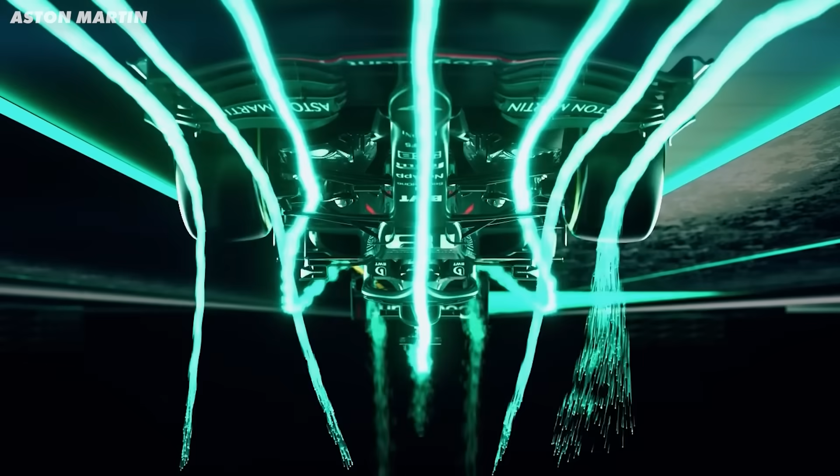£14 million. That's how much Project Inversion is going to cost. It is a huge amount of money, and in this video I'm going to share why it costs that much. If you're new to this series, we're planning to drive a Formula car upside down for 5 seconds with aerodynamic force alone. So the main costs, as you can imagine, are the car, building the tunnel and hiring the location.

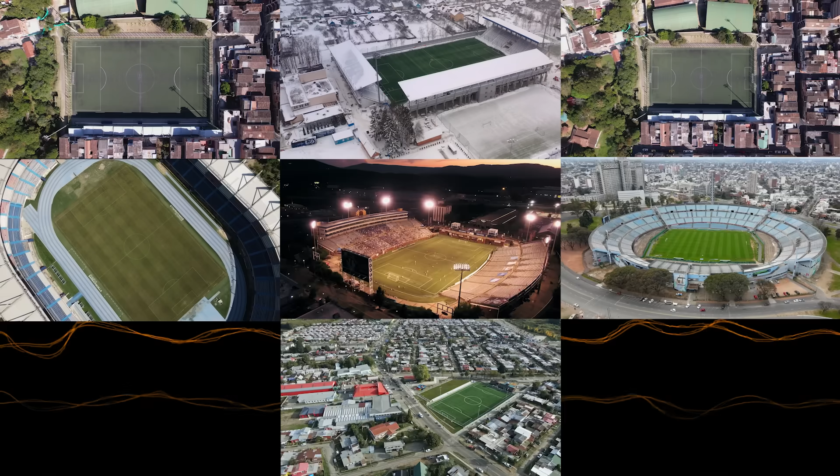And just the size of this project is astonishing. 1,330 tons of temporary steelworks, 131 tons of temporary aluminium works, 49,000 meters squared of plywood. That's the same as 7 football fields. And all of that plywood has to be held together with something, almost 500,000 screws. It's a whole load of materials, but we're using as many standardized off-the-shelf parts as possible, with our structural engineers having planned for as much reuse as we can.

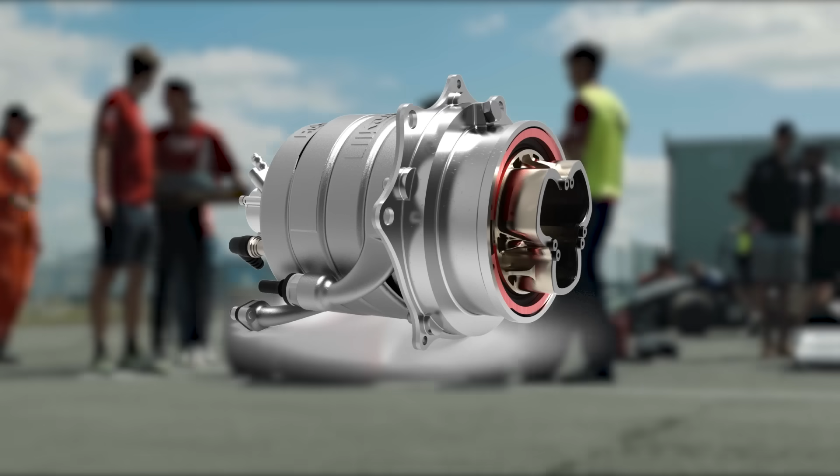So let's start breaking down the costs, and let's begin with the car. We're using the Empire Wraith hill climb car as the base for Project Inversion. It's light, has high downforce at relatively low speeds to accept the electric motors and batteries I described in the last video. And as an added bonus, it was designed by our head aerodynamicist Willem Toet, so he knows the car's design better than anyone. As race cars go, the Wraith is actually pretty well priced, costing £65,000 brand new from Empire.

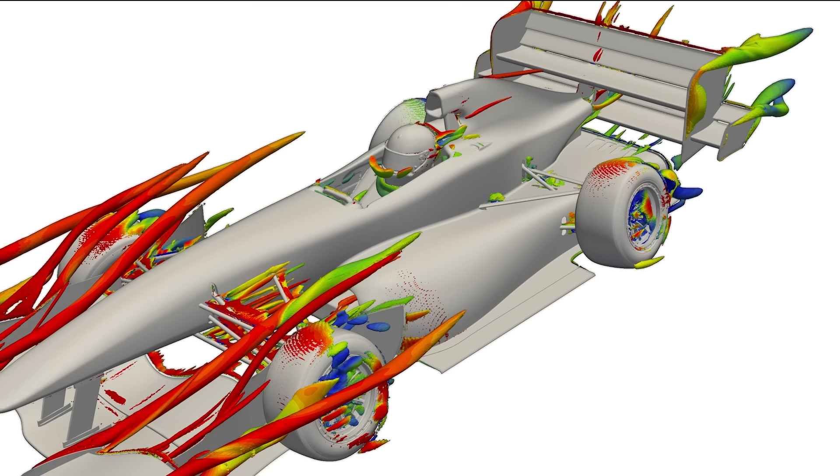As you might have seen in the second video of this series, Willem has made significant developments to the car, mostly aerodynamic, but we'll also need to make changes to the suspension setup and geometry because of the unusual curvature the car will be turning across and the camber required. So an estimate of the aero mods comes in at around £35,000.

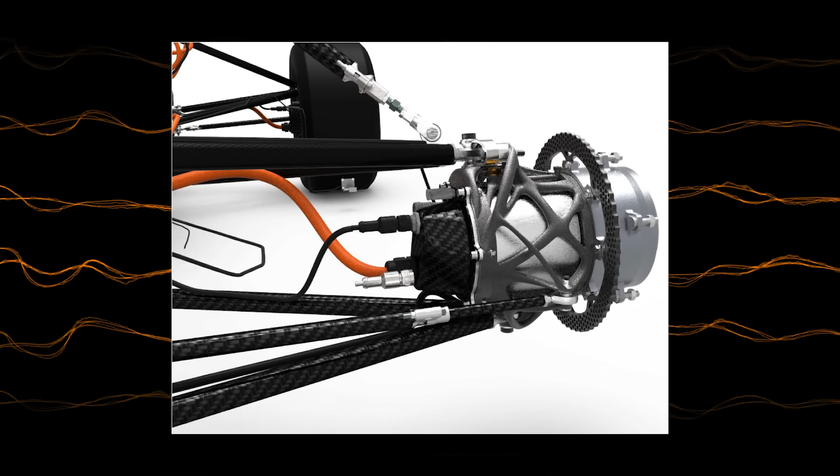But the main cost of the car modifications will be the electric motors and batteries. As discussed in the last video, we're likely going to be using incredibly small yet powerful motors, which fit inside each of the 4 wheels. As you can imagine, this type of technology doesn't come cheap. And we're actually yet to have a precise cost that we can share, but it will certainly be in the hundreds of thousands of pounds to develop.

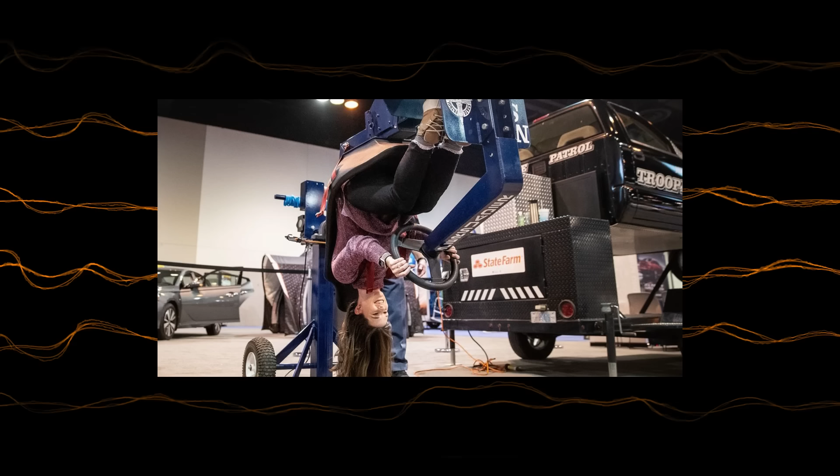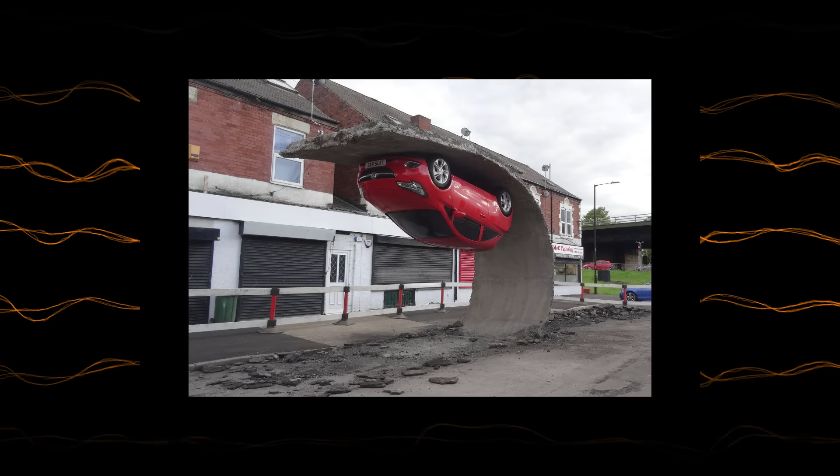So that's the car done, but we still need to test that it and the driver work upside down. And we also need to check that the downforce numbers that have come out of the computer correlate with the actual downforce the car generates. So we'll need to test that as well. First up, we'll build a mechanical simulator that can flip the car upside down while static. Here we'll be looking to make sure all of the systems on the car work properly upside down. We'll make sure that nothing unusual happens to the suspension, the motors and the battery, all things that have not been designed to run upside down.

Even small things like the seat belts could be an issue. Normal adjustable race belts have excess belt when you tighten them, which usually just sits neatly on the driver's chest. But when we're upside down, any excess belt would fall in front of my face, blocking my view. And that's not something we want to discover for the first time when we're doing the stunt.

And this simulator will help me get accustomed to driving upside down in a race car, which while it won't be the first time, it will be the first time I actually meant to do it. I imagine it's going to feel very unusual hanging upside down, and that it will take a bit of getting used to. I want to be sure I'm completely comfortable hanging upside down, as I'll need 100% of my mental capacity to ensure I drive the car properly and keep an eye on all the telemetry that I'll be shown.

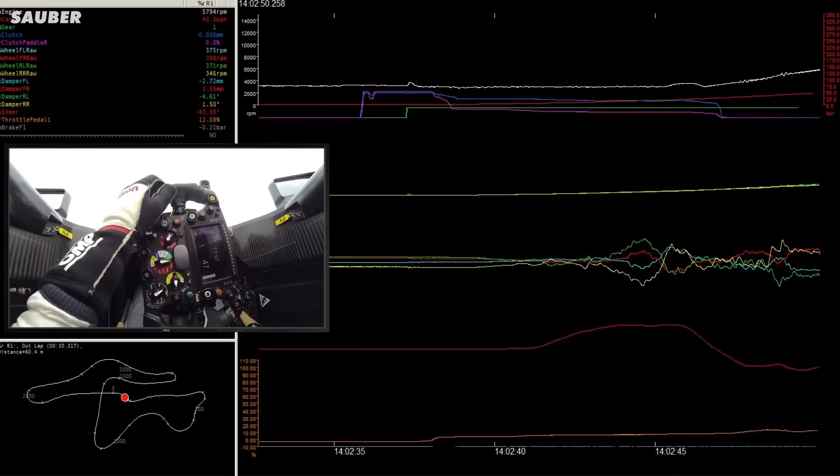So to make a simulator that can replicate loads similar to the event itself, and to purchase another chassis to use, as we'll be building the actual Project Inversion car at the same time, we estimate it will cost around £280,000. Once we've got the car and the driver comfortable working inverted, it's time to make sure all of the aero work is producing as much downforce as predicted.

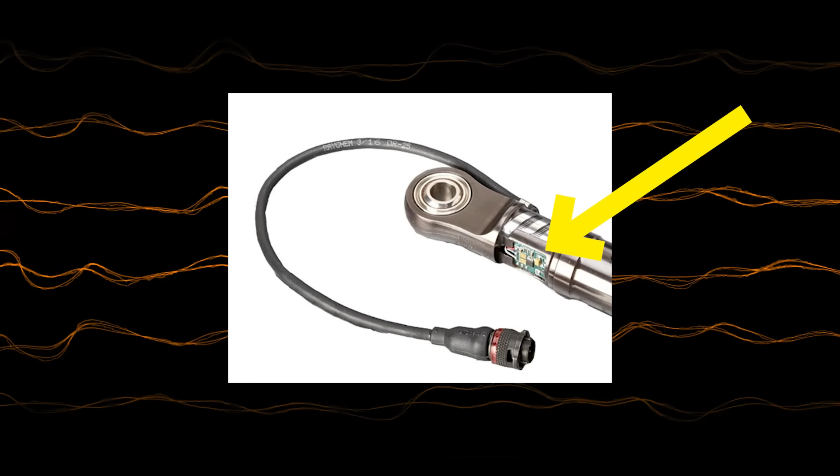The car will be covered in sensors to ensure everything is working how we expect. One of the most important sensors will be strain gauges in the push rods. As you might imagine, these measure the strain or the load going through the push rods, so essentially logging the car's mass plus downforce. The first testing will be done on a normal piece of asphalt, something like a runway. This is something that F1 used to do a lot to test aero.

Hire out a runway, do a straight line test that runs through a range of speeds, make an aero change and do the same again. And they do this to get real world data to show how different parts and settings affect the downforce levels. F1 doesn't do this anymore, but you might see drivers running at set speeds during a Friday practice session. When they're doing this, they're after the same data.

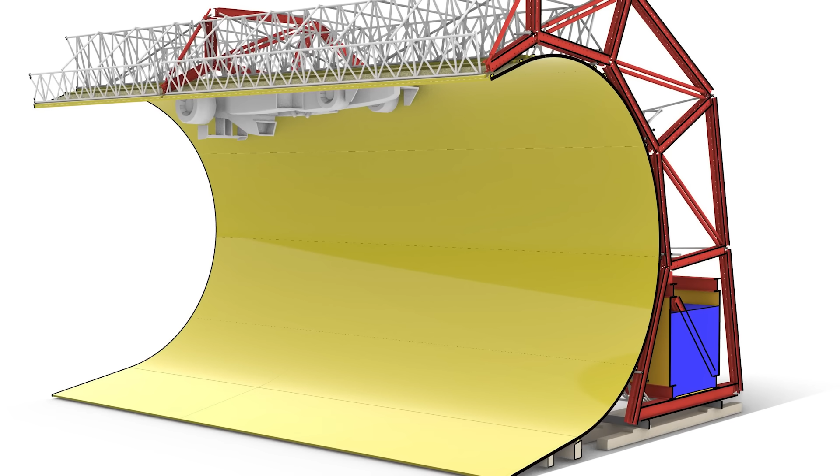Then, once the structure is built, we'll do some extra testing. This means we can check the car running in the curve of the tunnel. This is going to be critical, as the curve of the tunnel is going to negatively affect the amount of downforce we create. All in, we expect this testing to cost us another £170,000 if everything goes well. So that's about it for the car. Next, the real cost, the location and the structure.

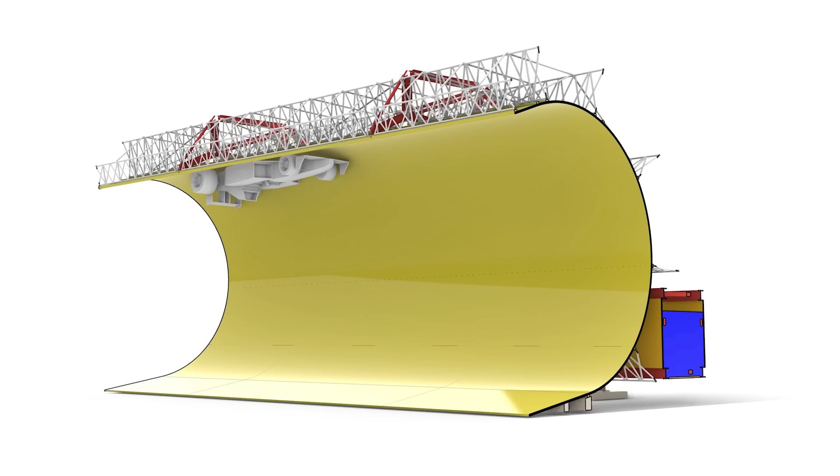The location for Project Inversion will likely be driven by the headline sponsor, so it's difficult to estimate what that will end up costing. It may be a large part of the budget, or it may end up costing very little. So for the purpose of this video, we've left it out. The location will also have some effect on the cost of the structure itself. Building this on a racetrack, a car park, or a runway will be cheaper than on less consistent ground.

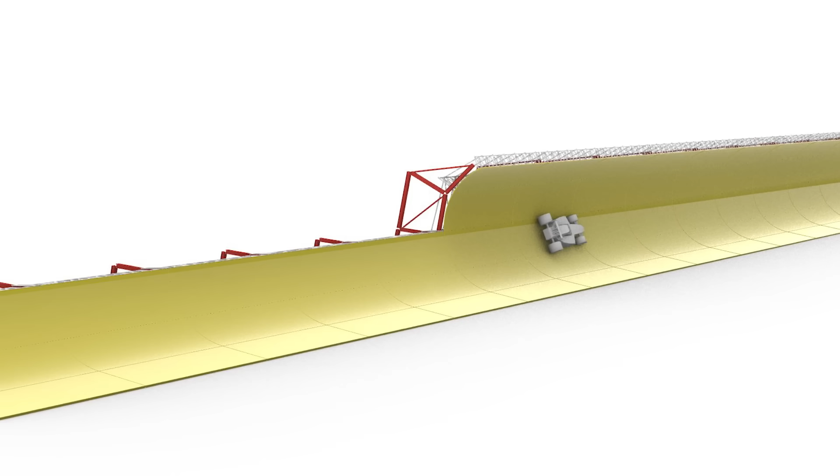And the location's temperature and the difference between the minimum and maximum temperatures and things like wind speeds will all make a difference to how the final structure will be built, and therefore the final cost. But the bulk of the costs for Project Inversion won't change. And the bulk of the costs are in the core materials for the structure itself. To remind you, the tunnel is 700 meters or 2,300 feet in length. It's 7.5 meters or 25 feet in height. It's going to use 1,500 tons of temporary metalwork, 7 football fields of plywood.

The raw material cost is massive, not to mention the huge team required to put it all together. And so the following numbers have been put together based on the car with a speed of 44 meters per second, which is a very conservative 98 miles per hour. In fact, we're likely able to bring the speed down somewhat below 90 miles per hour, once we've confirmed the downforce levels in a real-life test.

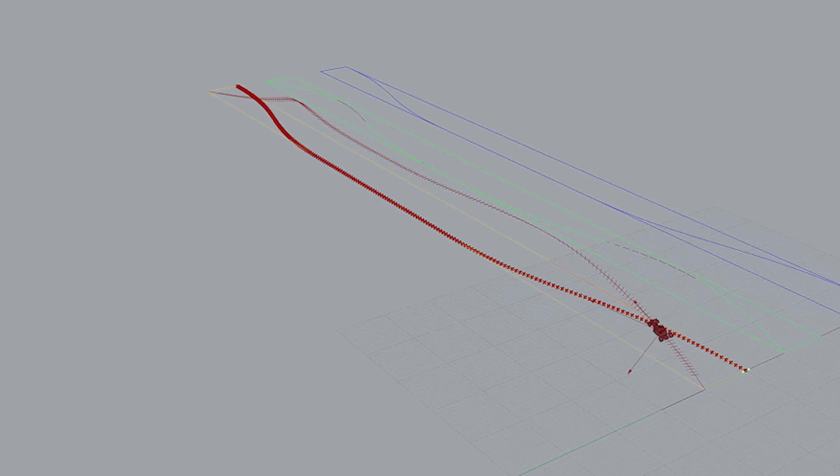Therefore, we may not quite need the 700 meters to enter the tunnel, transition to inversion, drive upside down for 5 seconds, and then transition back down. And of course, we could reduce the time upside down, although I really don't want to do that. However, this would reduce the cost. So here's the shopping list for the Project Inversion tunnel, and let's start with the framework.

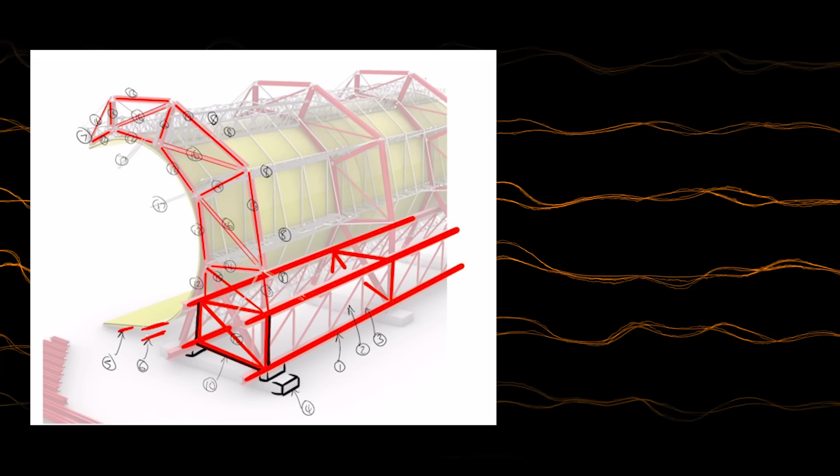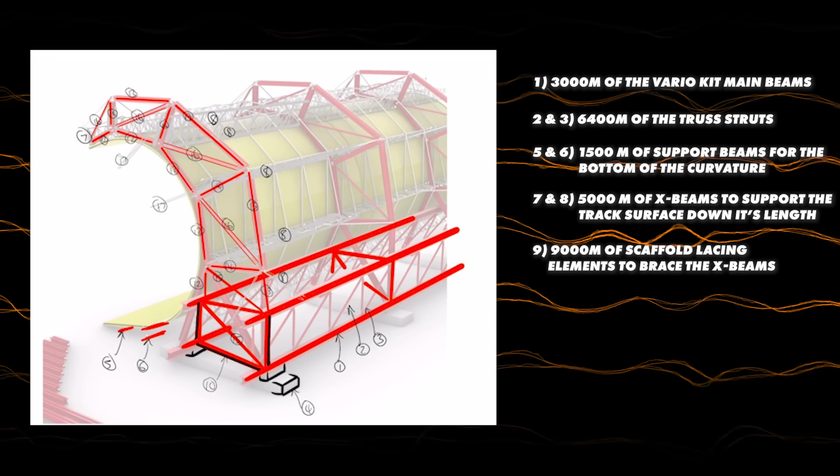First, we need 3,000 meters of the VarioKit main beams, seen just here. Then we need 6,400 meters of the truss struts, seen here. Next, it's 1,500 meters of the support beams for the bottom of the curvature just here. We'll also need 5,000 meters of X-beams to support the track surface down its length. And we'll need 9,000 meters of scaffold lacing elements to brace the X-beams. And this all sits on 1,900 supporting sleepers, seen just here.

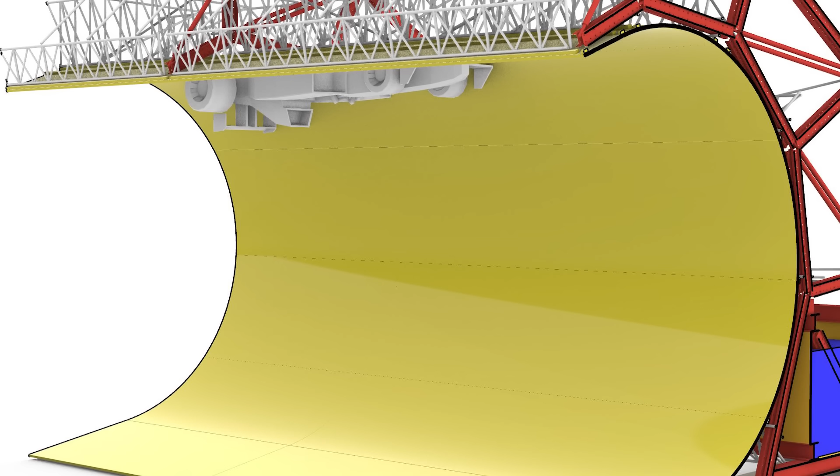So that's the framework, but now we need something for the car to actually drive on. We need the surface. The total area of the track is 11,000 meters squared. But in order to have the strength required and for the curved surface to retain its shape, the surface is actually going to be made up of 4 layers of 12mm plywood, screwed into place one after another. And that's a lot of plywood.

In fact, it's 1,160 sheets of extra large 2.4 meter by 9.5 meter pieces. They're sheets that are 10 times bigger than what you'd get from your local hardware store. And they all need to be fixed in place with almost 500,000 screws.

DeWalt, if you want to sponsor us, we'd be more than happy to talk.

And with it all being screwed in place, we'll be able to reuse a lot of the surface. With us, Expedition Engineering have put a lot of energy into making this project as sustainable as possible. We'll also need to finish the surface. And as we don't have any racing regulations to adhere to, we're aiming for the highest grip possible, although we're yet to make our final decision.

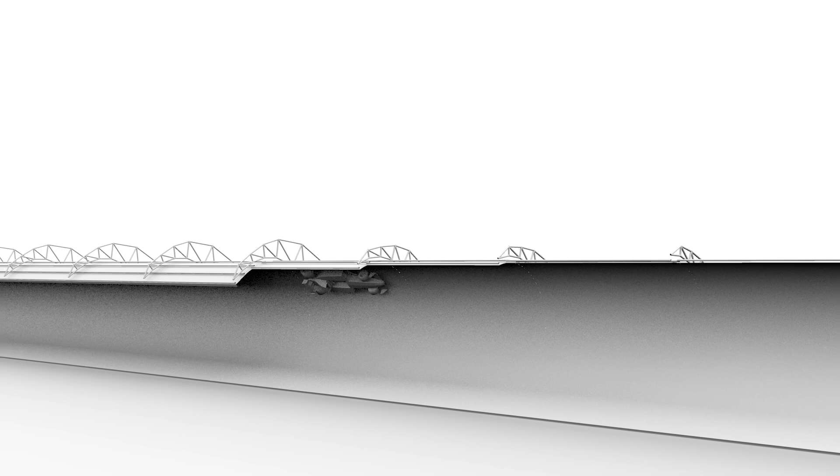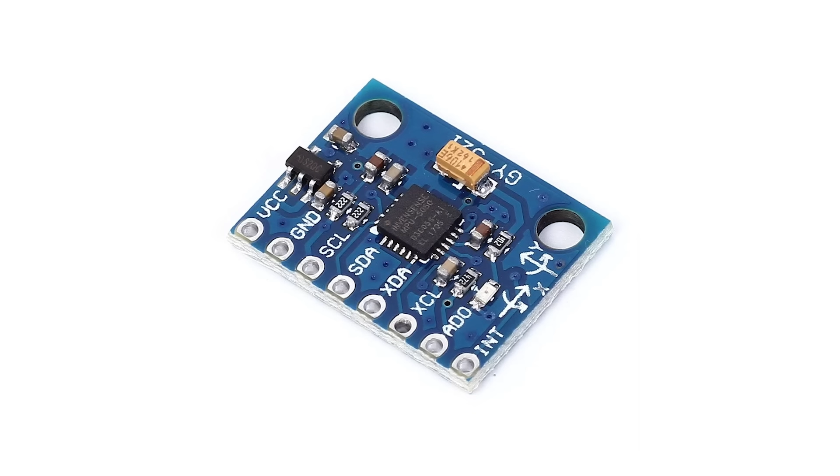And of course, the tunnel itself is a huge advertising board. So there'll be some costs involved in printing on the surfaces where necessary, although this will be a small percentage in the whole project. We'll also need some accelerometer sensors in the structure, so we can understand if the structure is moving in the wind or with the car, and by how much. So they're the raw materials, but we also need to have a huge team of people to put the structure together over what is likely a couple of months, and surveyors to ensure everything is safe before we're given the green light.

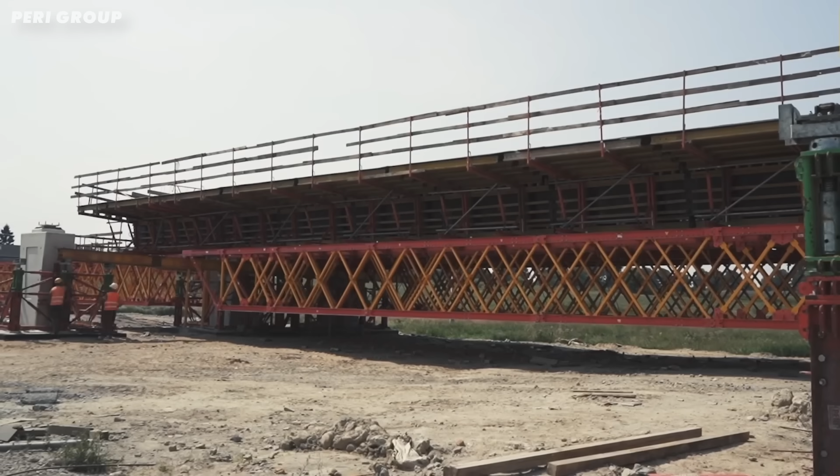This is the final installment for the moment of Project Inversion.